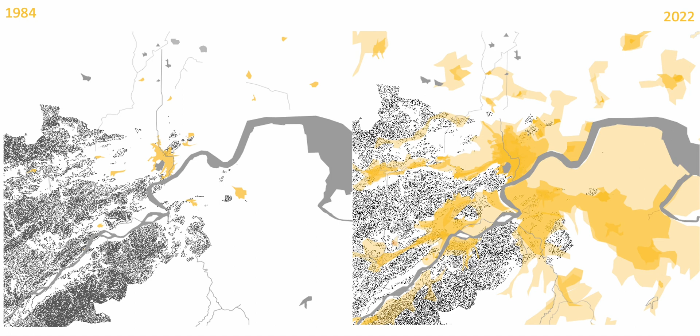Being this huge metropolitan city, we thought of points of interest for our project, and we focused on the Grand Canal and the West Lake because of their obvious importance for communication. We also wanted to give importance to this idea of the sacred mountain.

So one is the mountain place with the forest, and the other is the mountain right next to the other historical centers, not as well known as the one by the Grand Canal and the West Lake. As a potential interest point, we also see the university campus, a place of gathering and social interaction.

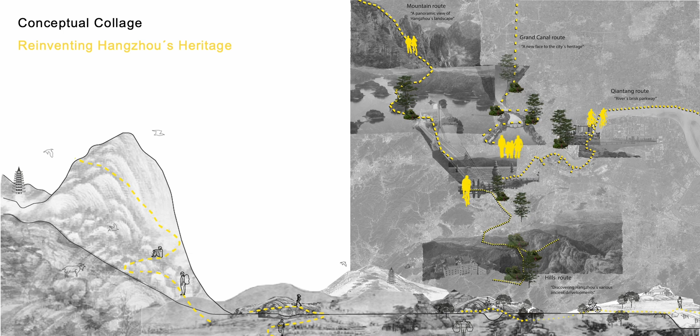Our goal is to reinvent Hangzhou's heritage, so obvious for us was to create different routes that show the different parts of the city we wanted to highlight and connect, creating this chain of routes that serves as a connection for this big metropolitan area. For us, culture is the main perspective, focusing exactly on this transect.

As a first route, we have the one ending in the northern mountain, called the mountain route, which for us is a panoramic view of Hangzhou's landscape. This starts in the West Lake but goes through the wetlands, reminiscing the agriculture of China, ending up in the mountain, like a vegetation route.

Then we have the Grand Canal route, giving a new face to the city's heritage. The Grand Canal is important, as we said, but we want a new point of view on this area since it was the old, important touristic historical center. Now we want to see it as a way of communicating the city, becoming the heart of Hangzhou and a path of connection with other cities of China.

For us, the Qiantang route is this river's brisk parkway that connects entire Hangzhou through its river sideline. It's this chain of green that goes through the riverside and takes us to different social interacting places, connecting the different parts of the city.

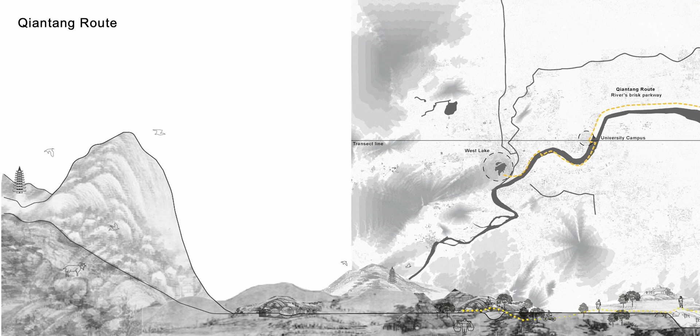As a bonus, we have the hills route that helps us discover Hangzhou's ancient developments. And that is how we get to this master plan showing all the different routes for Hangzhou, and in its transect we can see how it goes from the lower plane to the upper plane.

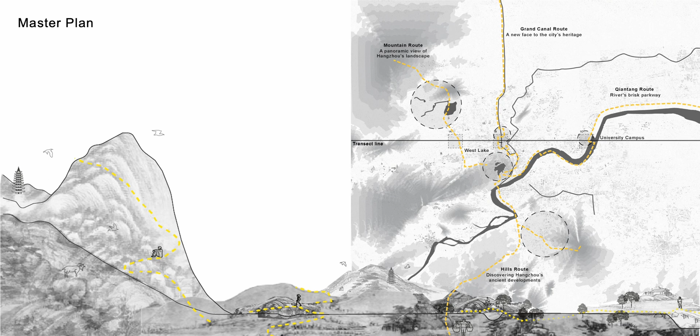Going a little into the inner part of the city, at our L scale we have different challenges. We have to highlight the landscapes and agricultural culture of the city, give pedestrians a central role in the historical center surrounding the Grand Canal, and make the waterfront of the river a catalyst for inland connections.

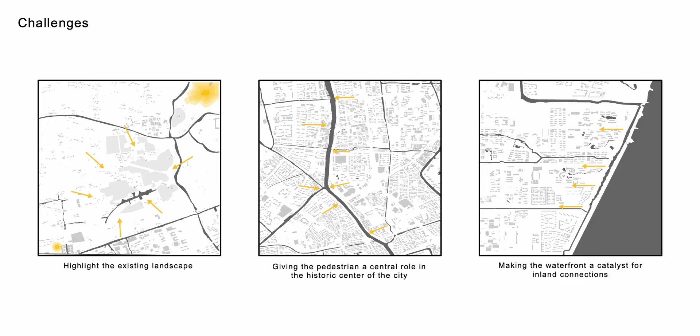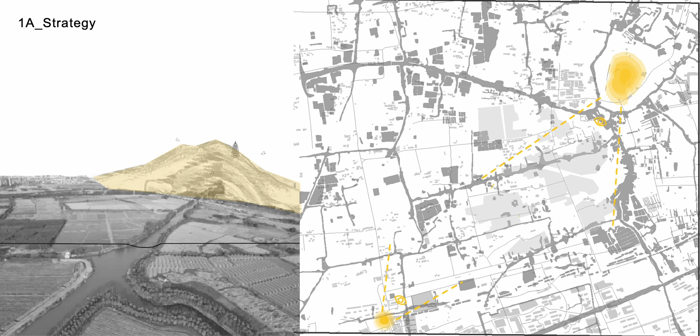Going into the first L map, we can see the wetlands and the agricultural plains. Here we identify the mountain and a tower situated in the south as main elements. The importance lies in the views these main points give us. As said before, our target areas are the wetlands.

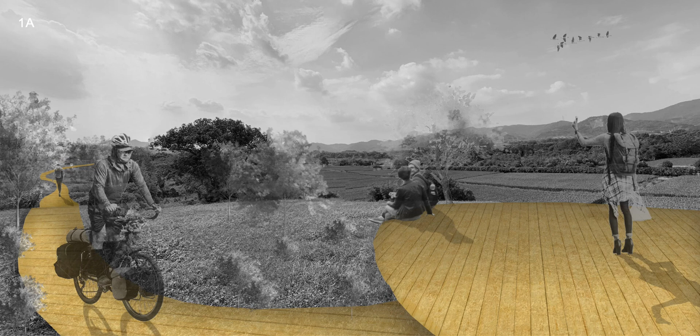Finally, we can see our route that connects through bridges to different wetland areas, taking us through the path of agriculture and its surroundings. This is how we see the success of the route, with people watching the wetlands. As a first glimpse of the second L map, we can see how the Grand Canal is the main element.

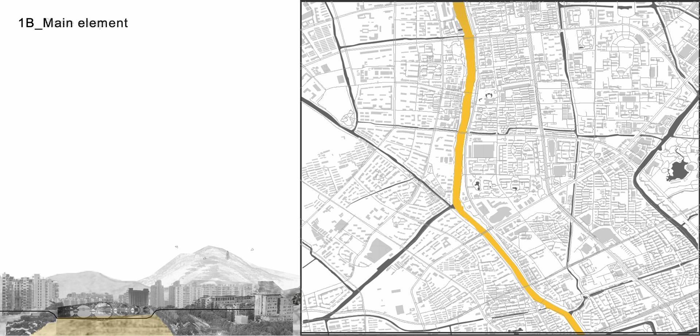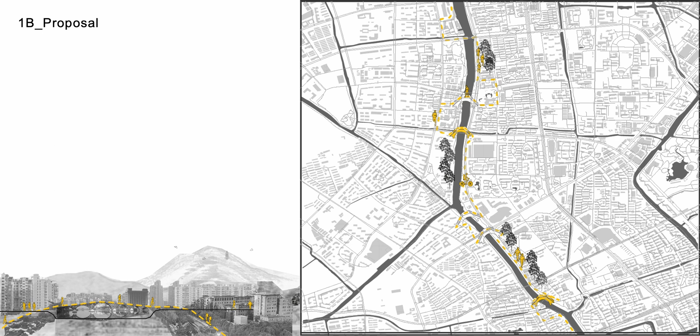The strategy is to bring people to the Grand Canal and its surroundings. Our proposal is to make a few connections on top of the Grand Canal and go around its blocks to not only get to know the Grand Canal itself, but also its surroundings.

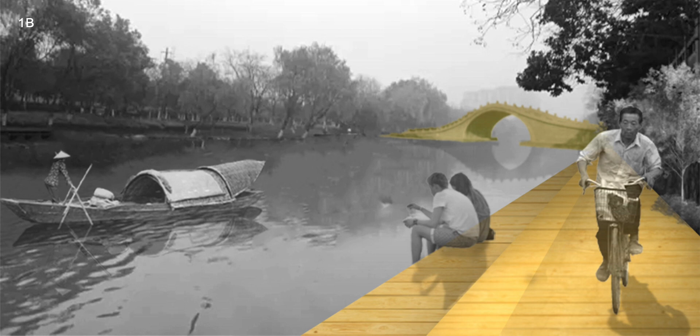As you can see here, they enjoy the views of the canal while crossing bridges that allow us to enjoy both sides of the canal itself.

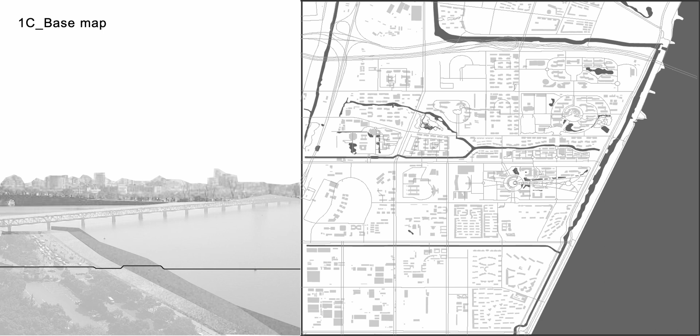For the third base map, we can see how it focuses on the riverside. Here the main element is the waterfront, and the strategy is to cross this waterfront and get to the other side of the city.

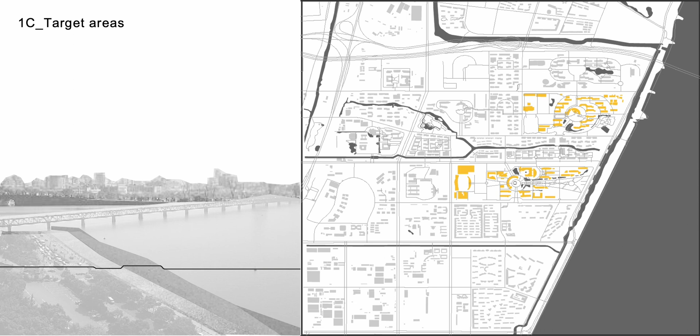The target areas are the university and its surroundings. Lastly, our proposal consists of different bridges that connect the riverfront with the land itself, taking us inside of the city.

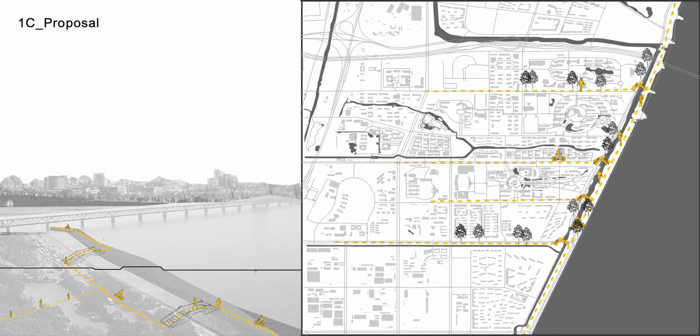Here it's easy to see how the idea of the bridge is to connect to this central line of communication of the entire city. In this one, we can see how we approach the riverfront.

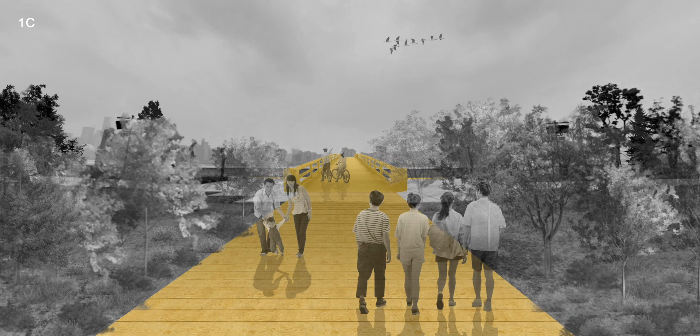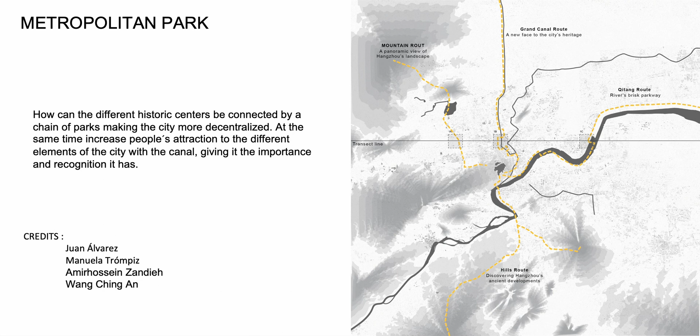Finally, we want to remember our goal was the different historical centers connected by a chain of parks to make the city decentralized. With our master plan, we show these different routes that connect the entire city, with different elements that give importance to the city, not just the historical centers we already knew.